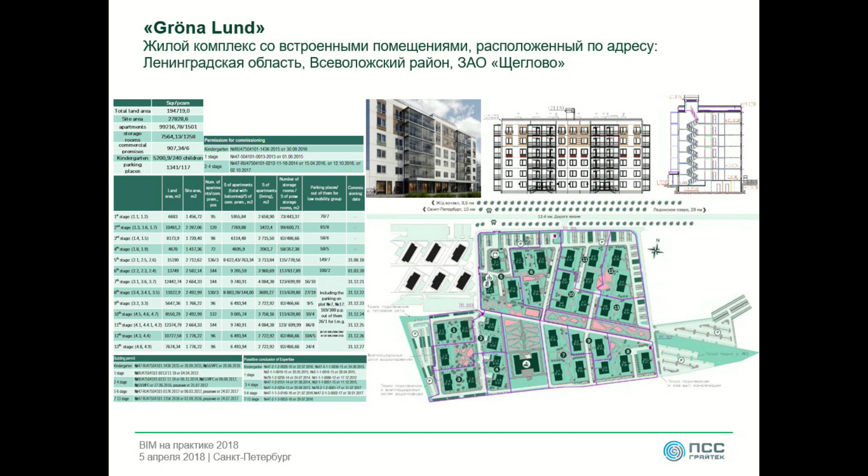What we're talking about is our housing facility, Gröna Lund real estate area, with 100,000 square meters. There are 6 floors and a basement underneath it. We are going to talk about stage 5 and 6 of the construction cycle, and to demonstrate that what we do, almost all real estate developers can do.

What were the goals? First, to ensure the quality of the design documentation and to reduce the number of errors. Second was to get the information about what we needed for budgeting and for purchases according to the goods register. And third, to get promotion materials for sales and marketing. For this goal, we used the services of our partner.

Last January, the construction began, and the design was already lagging behind the schedule. So we asked our partners to help us. What we did was we requested an information model to be provided in such a format that we could have used it in our business processes, internal business processes.

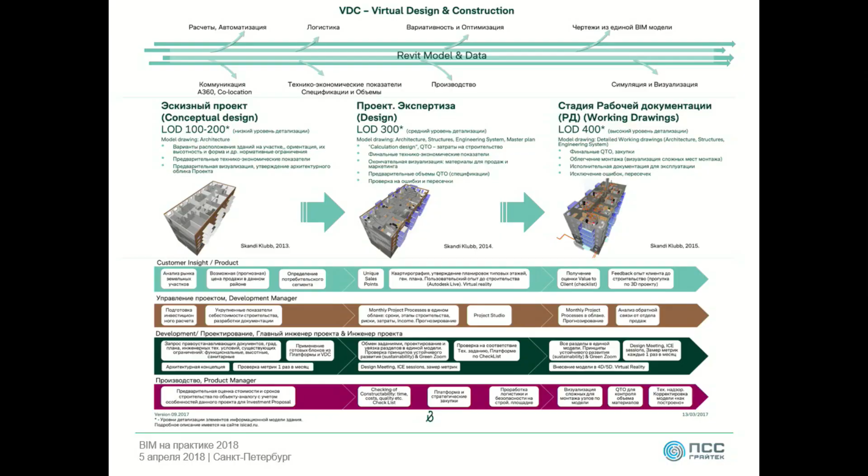This is how these processes look like in our company in St. Petersburg. But the core of this process is information, and PSS GRAITEC was the company who provided this information to us. And I'm going to tell you how we did this.

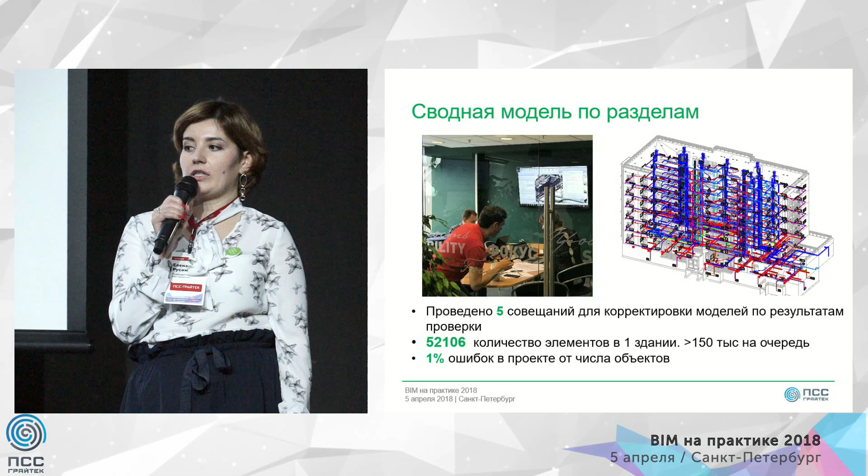First, we did all the modeling for architecture, structures, engineering networks, electricity. Then we used the drawings from the architectural stage with LOD 400 detailization, level of detail. So our joint model was done in Model Checker. Each building consisting of 50,000 elements.

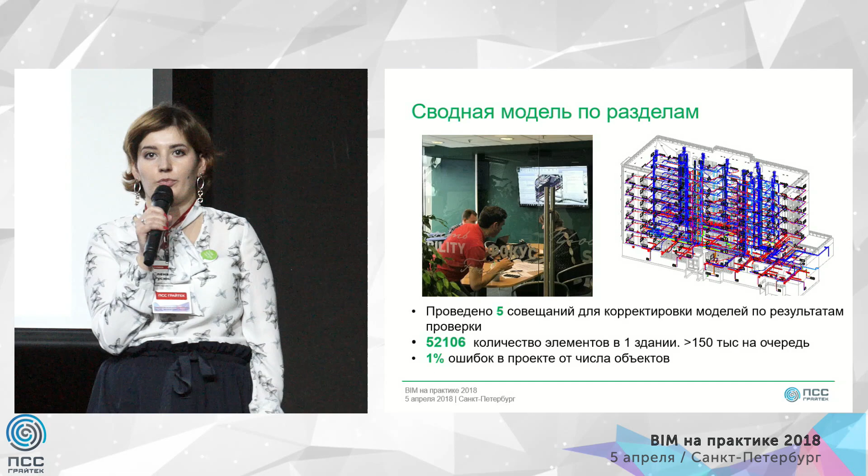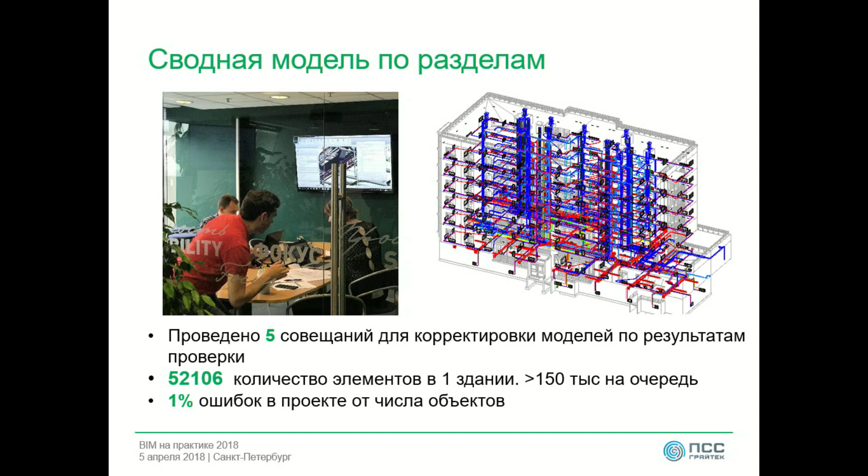When we did the verification in Solibri, we found out that the mistake percentage was around 1%, and based on the error reports, we met with the client representatives, and we updated the model right during the meeting. We found out the best ways to locate the engineering networks, especially in the basement area, because this is the area where engineering networks were concentrated.

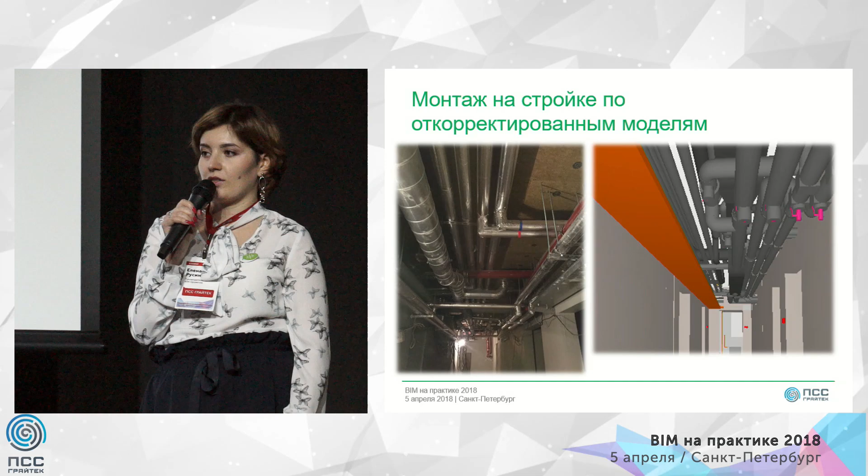Based on the results, we issued the R-stage drawings, and then on the site we installed the systems using the models. So here you see the Solibri model and the real site model. So the model detailization involved volumes, QTOs, in accordance with the customer's requirements.

Importantly, the volumes, the quantities, we received them from Excel, and we are currently switching to a new software piece, which is called Sigma Estimates, that helps us to compare the Revit data and extrapolate it to the budgeting program. It helps us. It is a two-way program, solution.

It can be used by our specialists. They can alter SKUs and trademarks, and then if it is changed in one of the systems, it is reflected in Revit and then updated on the model.

After the budget specialist finishes budgeting and moves all this to the entire package, this is the data for Gröna Lund. They get a final procurement data, final procurement package, and it may also be sent further using the Envalia program. In this software, there is a functionality to run a tender and select a supplier contractor.

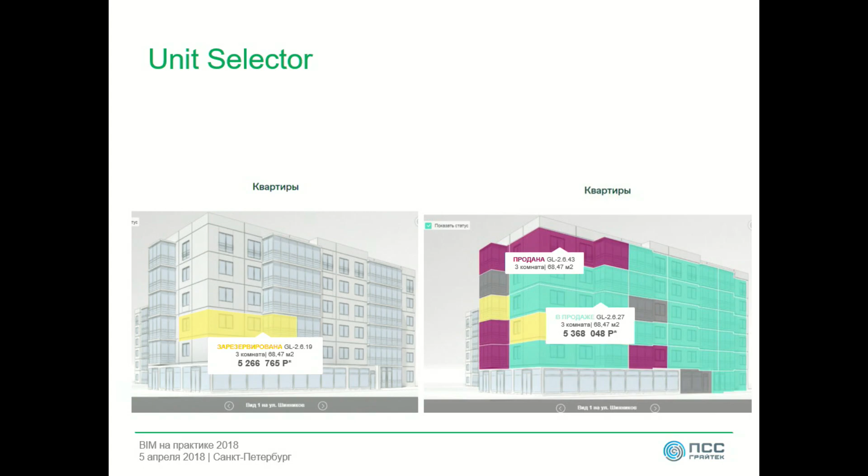We get different demonstration materials, marketing materials. There is a range of materials that we use for marketing and online, and we get them using the BIM, the digital model. First of all, we generated the Revit model, and we wanted to use this data for marketing materials on our website.

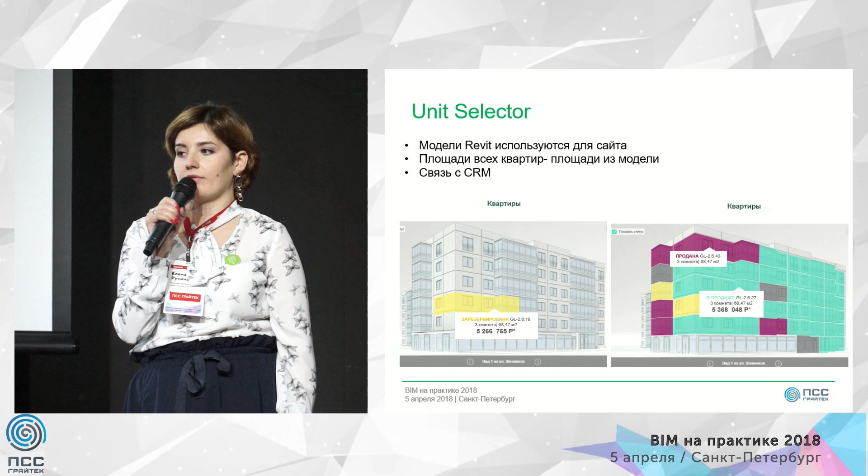We used the unit selector tool. It operates the data on the area of the flat and other parameters. It is interrelated with the CRM system, and by means of comparing data, there is a chance to put a price tag to a dedicated flat.

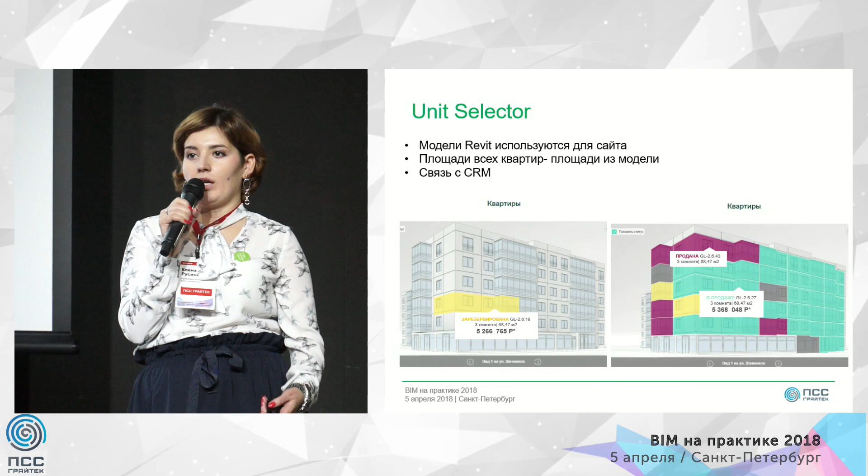We can automatically update information on the website using this tool, and our customers are able to see the most updated information on the price of flats.

Another objective is getting the flat notes or flat leaflets. All this comes from the model. Before that, the customer used CorelDraw to draw these drawings of flats, and that was a solution that cost some money, but now we get this information from the model, and by doing this we avoid a lot of mistakes because it involves the most updated information.

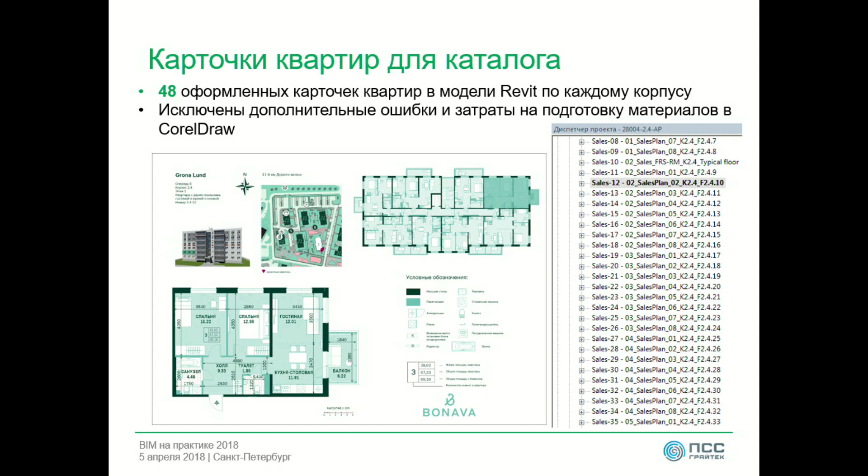So the data from the designers are automatically updated and put to the drawings, to the flat drawings. So in this slide you see the view of the final flat drawings presented to customers.

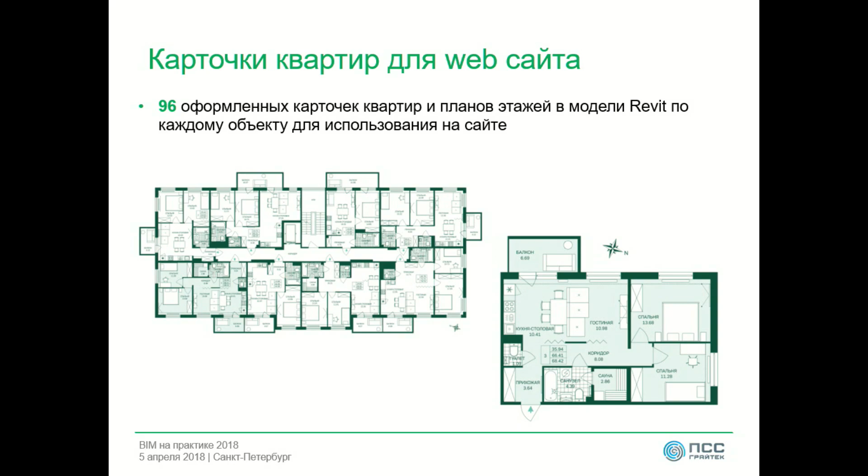Using the data, we also developed materials for the website, so our customers, the visitors of our website, could see the plan of the flat and its location in the building. We generated 96 drawings to be put on the website online.

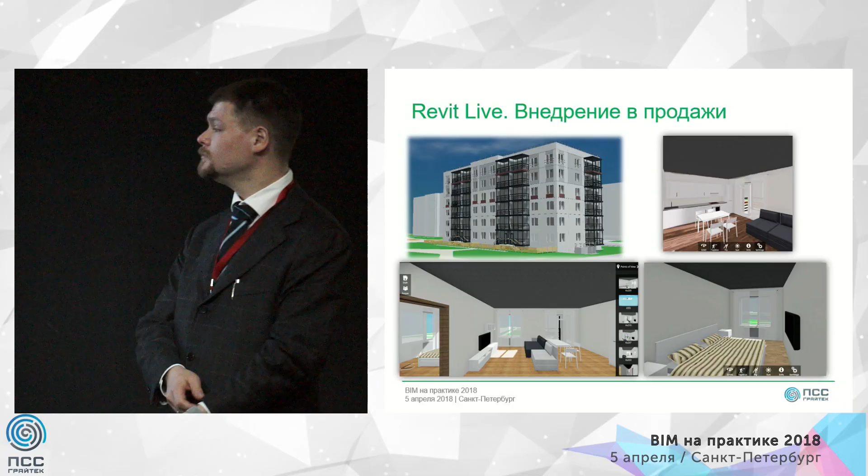We decided to use the working model and show it to our customers. We integrated the finishing works into the model and added real furniture to the flats, and our customers had a chance to see the flats in reality and understand the project in detail. The feedback was positive.

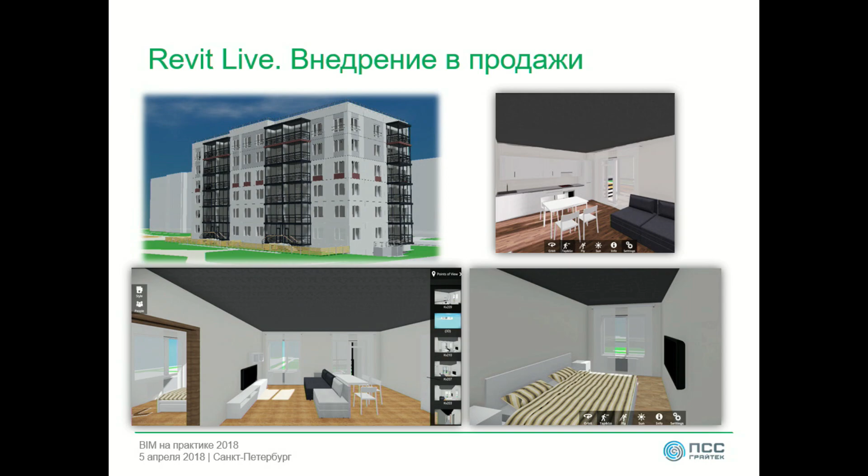We used Revit Live. The models were imported to Revit Live, and we used it to demonstrate our products. We use this information for our sales department. We are currently testing this, and our sales department is using the pictures they get from the models in their sales process.

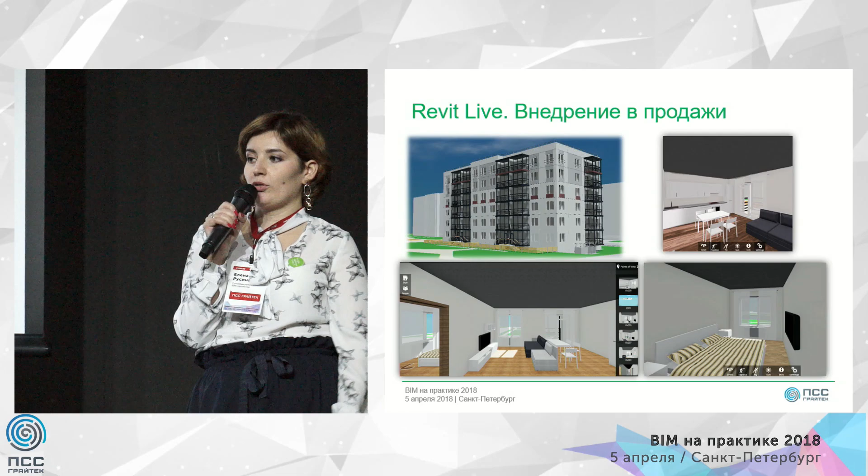We modeled the furniture inside the flat and also the finishing works on the walls, and we could track a particular flat and its location in the building. It helped us calculate all the data related to the finishing works and get such pictures to provide an opportunity to roam inside the software.

The model helps us visualize the process and get up to 30 to 70% of time savings by creating such beautiful visualizations.

The furniture has real parameters and corresponds to Bonava packages. These are real pieces of furniture that can be bought from IKEA, for example. Such modeling helps us save a lot of time and money in producing such wonderful and beautiful pictures for our customers.

Our final results helped us reduce the number of mistakes, so we reduced the number of corrections to the final project and to the construction process itself. It is good news for our subcontractors.

We also have an opportunity to get specifications early, and this helps us raise the efficiency of procurement. For example, for tenders, when you have a package sent for the tender to the contractor, traditionally contractors use dedicated departments that calculate everything for the tender and study the documentation in detail.

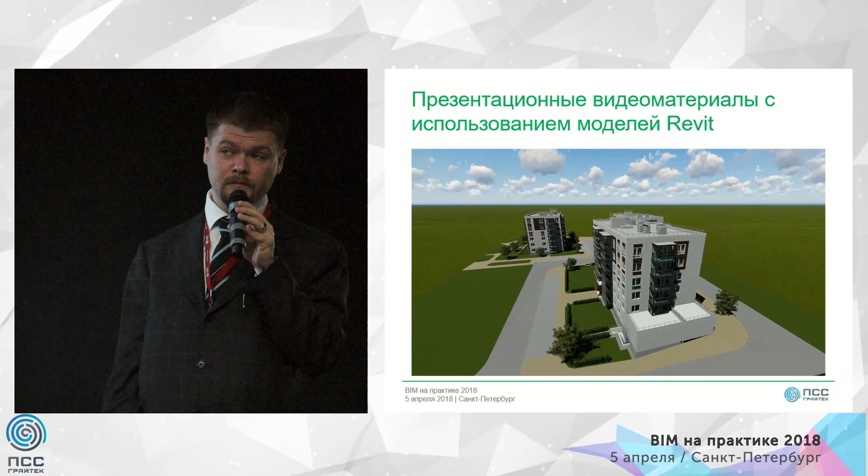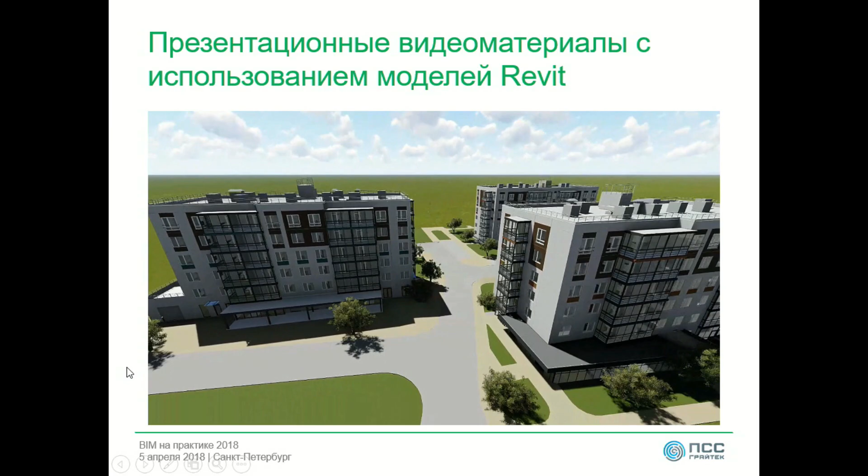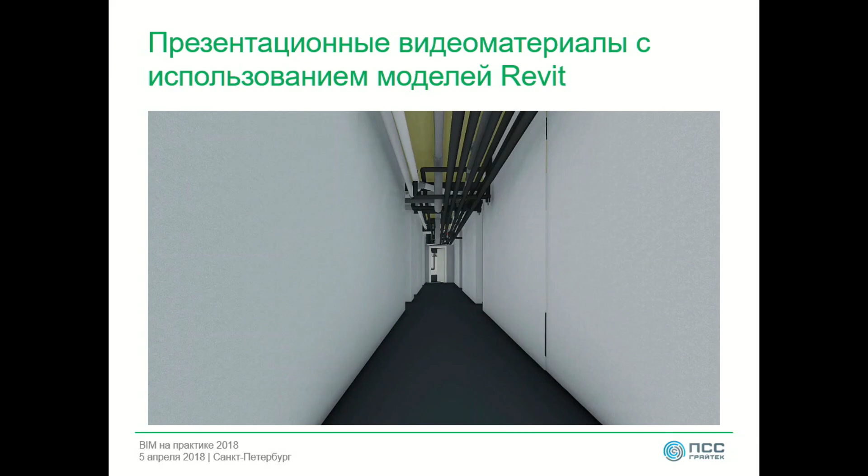In this clip, we see that two weeks before the VIP event mentioned by Alexander, people asked us if we could provide materials for this meeting. So in just a week, using the data we had, we could create such a clip. We used a dedicated software tool for that, and in a short amount of time, we produced a real picture.

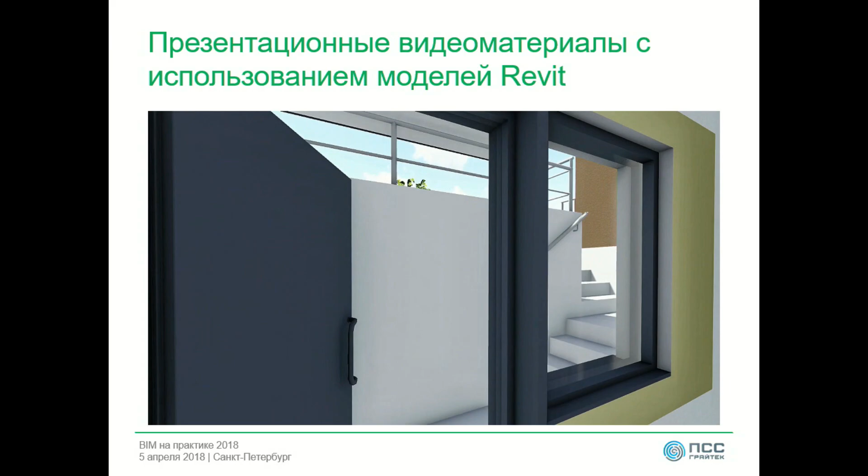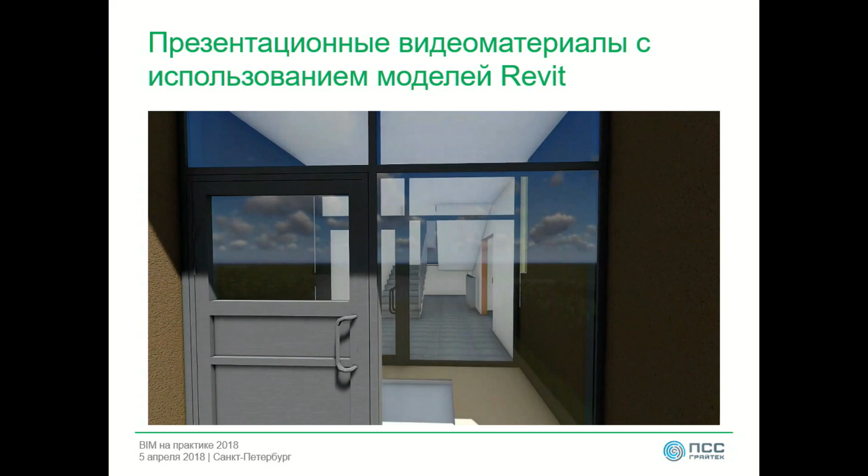Probably it's not very high quality, but the cost of producing this video was minimum, and it was a big advantage for our customer. So that's it. Thank you.